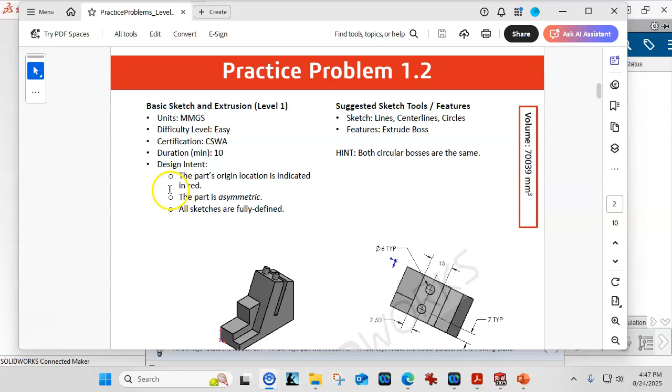The part's origin is located, indicated in red, in the bottom left corner. And the part is asymmetric, so mainly the back is shifted.

And all sketches are to be fully defined. That should be a really good habit you get used to.

And then sketch lines, center lines, circles, we'll do the extruded boss. Both circular bosses are the same.

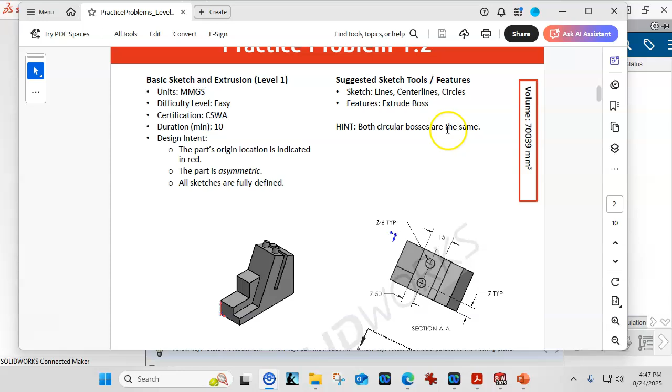So what jumps out at me in this model, looking at the front view, is we can divide this into, let's just say, three bodies, or three features, to create the one body.

So this main section, I'm not too concerned about the slot going through. We could include that in the sketch, or it could be a separate cut feature. It depends on kind of what our design intent is, what the function is of that piece. Is it going to be easier later on to make adjustments, corrections, even possibly eliminate it if the design warrants it?

So dimensions, we're going to be dealing with some angles. Not seeing anything too crazy, so we do want to pay attention to all of these.

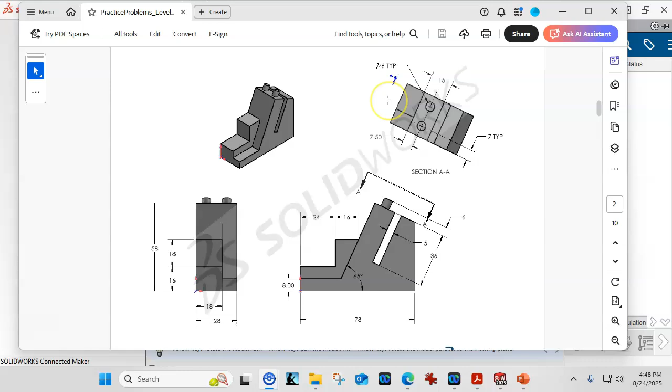Keep in mind that this being an auxiliary view, their origin is kind of floating out in space, which sort of makes sense, but that might be a little bit confusing. So let's go ahead and get started.

So I've loaded up the maker version. We're going to see the welcome to SolidWorks screen. If you want to use the defaults, part, assembly, and drawing, those are going to go back into the standard templates.

And I have created, if you haven't watched the starting SolidWorks for the first time video, I create these part millimeter and part inch, and I designated them. If you're using the maker, keep in mind that the education and commercial versions will load into maker, but once they're saved, they're maker parts and they don't go back. So that is why I've separated those out.

When I'm doing an introduction and just kind of feeling out the differences with the maker, when I switch back to the education version, then there'll be some things that we point out on that side. But again, you don't need to sign in unless you are using the maker version or the online, and we'll have a couple of extra things over here on the task pane to deal with.

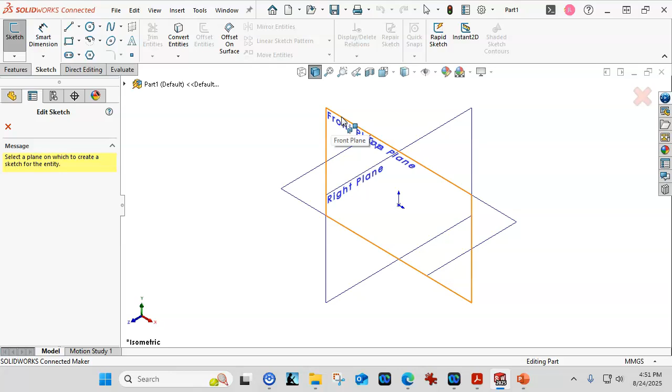Let's go with the sketch, and then I will add in my preferred right click. So if we do a sketch and then pick on the front plane, well, we're verifying that it is highlighted. And as we move around, we would see that color shift from plane to plane.

All right, so looking at this from that standpoint, I'm going to do the line command, and we'll move into more of the sketching tools as we go, but particularly at this point, I want you to pay attention to the on-screen icons, the relations, the inferred - the hey, you're there, but I'm not going to apply it - so the white background versus the yellow background.

And we're pretty much going to draw this first shape and get it as close to fully defined as we can. Then we'll worry about the slot.

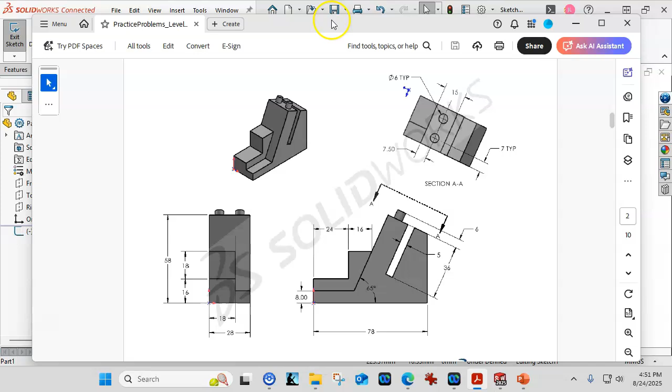Okay, so we're in the sketch. Horizontal is the short leg, vertical is the long leg. We go to the line command, or L on the keyboard, and I'm looking for that little bit of a snap. When I get close to it and the origin highlights, I see that yellow box.

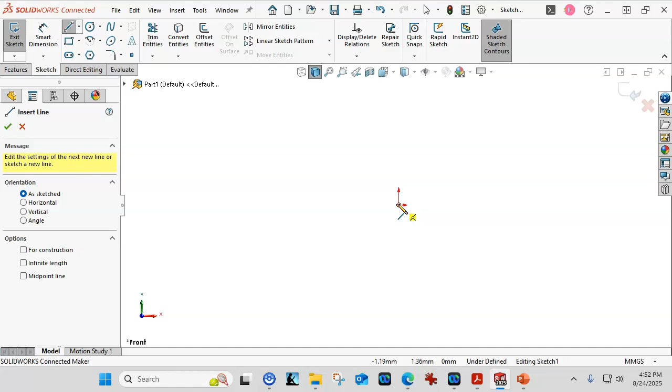That tells me that I'm going to get a coincident relation, and I clicked to place it, and our distance is about 78. I'm not going to spend too much time trying to get it exactly to 78, but close is okay. And then I don't really know what that one's going to be, so a click and a click, and we'll come back.

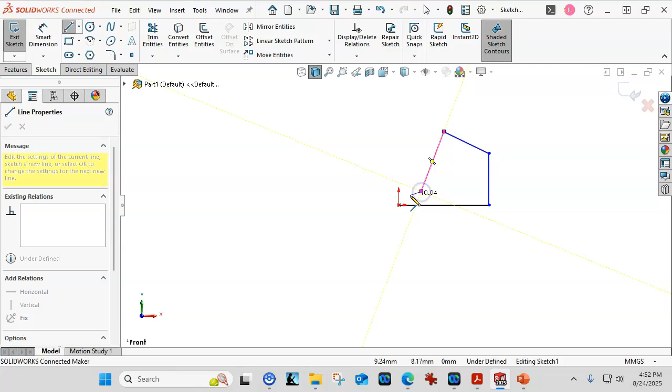Because of the angles, you have to be careful of picking a perpendicular. So I'm just going to accept and back out of those. We could also hit escape on the keyboard.

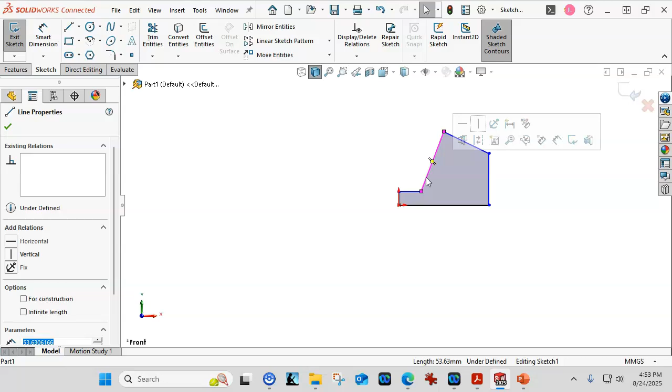As I go through these, we have the vertical, we have the horizontal, and what I'm hoping not to see are any perpendiculars that were inferred while I was clicking through and not really paying attention.

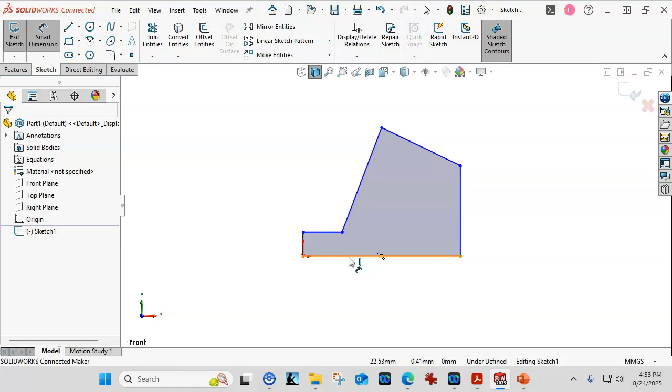So we're going to go into the smart dimension, and our process is always going to be, stay away from the midpoint unless you really want the midpoint. We'll highlight that object, click on it, place the dimension, and that gives us the modify box. You have to set that dimension down somewhere for it to activate.

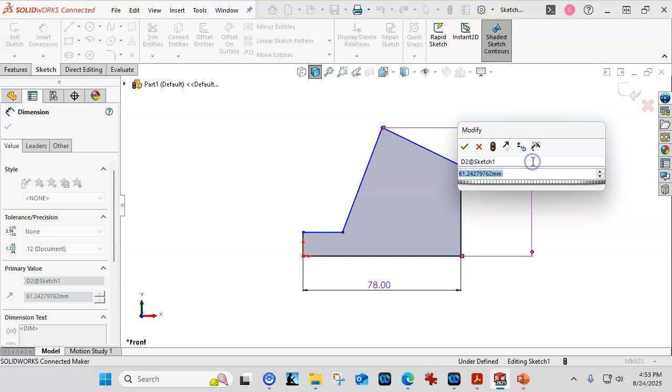We go into the 78. We have an overall to the tip of 58, so we're going to be looking at the base to the point. And then we have the 8 millimeters from the side.

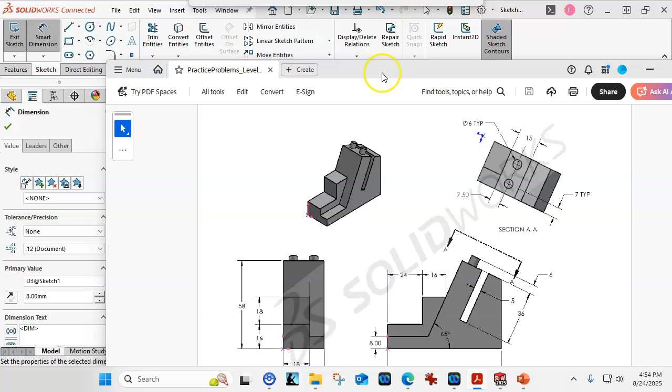Now they're throwing a little bit of a loop at us with that side geometry. Maybe I'm not ready to throw the areas at you, but it's something that we're going to utilize and you're going to have to get used to. So we'll go ahead with creating a couple more regions.

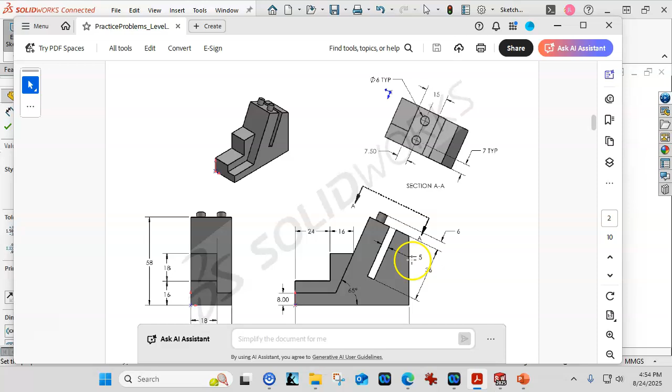So to build this out, I need the dimensions for this to kind of set the point of that angle, and these heights to determine where those items are coming up at.

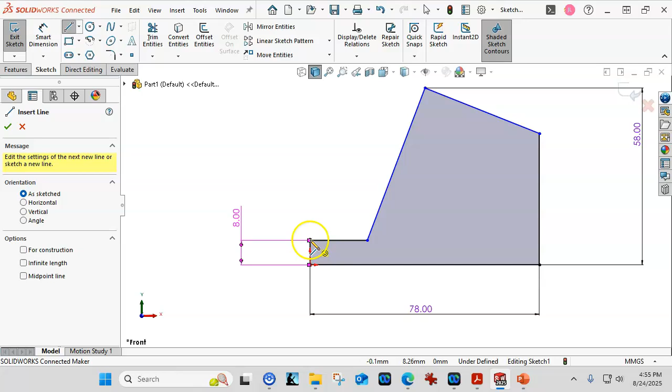That being the case, we're going to add in. Now, as a general rule, try not to create geometry on top of other geometry. Duplicate entities may cause the sketch to go underdefined. They're kind of a pain to diagnose. It's not a good practice, not a best practice.

All right, so there I got a midpoint. How do I deal with that midpoint that I didn't necessarily want, but I didn't catch it in time before I let go of the mouse button because I was doing the click drag?

All right, let's get out of that. When I highlight that point, I'm going to see the midpoint box in the work area. And then I'm also going to see midpoint 2. I can highlight that and hit delete on the keyboard, or we can right click and hit delete.

Be really careful with delete all. If we've applied a lot of relations to that one piece of geometry, then we probably don't want to delete all, because it does exactly what it says. Everything in that box goes away.

All right, so let me undo that because my fingers were ahead of my mouth.

I'm dragging this away, so a left click, hold down and drag, and I'm just looking for that to be coincident. If it's not particularly what we're wanting to select, I can always select the endpoint and hold down the control button and select. So you will hear me talk about select, control, select quite often.

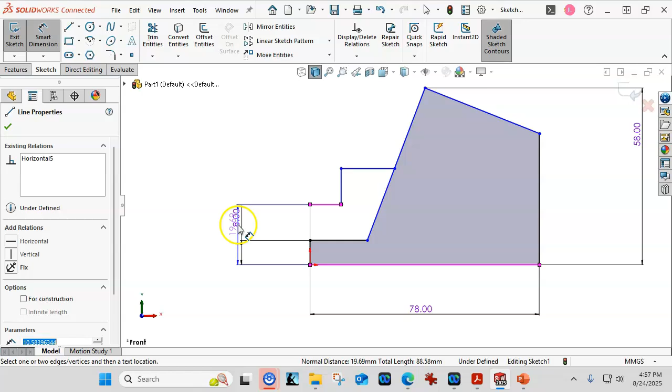All right, so let's see, that one, nope, that one goes, so I'm going to escape out of that. If I hit escape once, I'm still in the dimension tool. If I hit escape twice, I'm pretty sure it kicks me out of the tool, and we have to go back in.

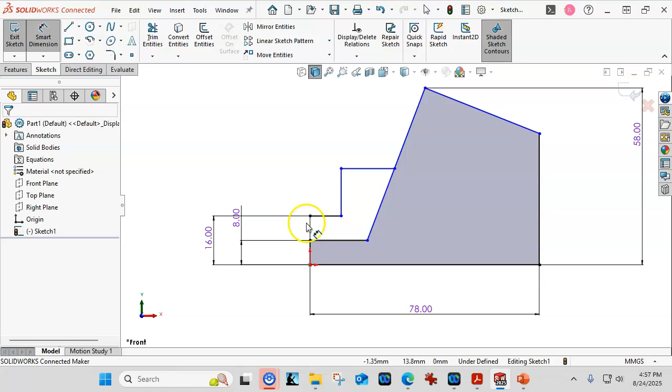So we're looking for those gray items. For example, if I hit escape, the smart dimension up here goes from the active gray to the lighter. All right, so I need to get back into that, make it the dark gray, and then we're going to add the dimension there.

And 18, and we have the 58. Oh, and then we're ready for an angle.

So what makes an angular dimension? Any two non-parallel lines. If these were at right angles, we would see the 90 pop up, but as soon as I pick the two objects and apply the dimension, it's automatically going to be in degrees, and then that's going to give us our working angle.

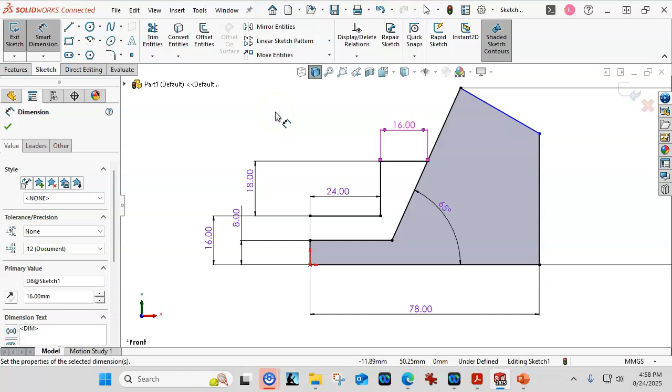All right, so that goes to 24, and that one goes to 16, and because it should push out the geometry, now I am looking for why this one isn't fully defined. So we have the 36 to the face.

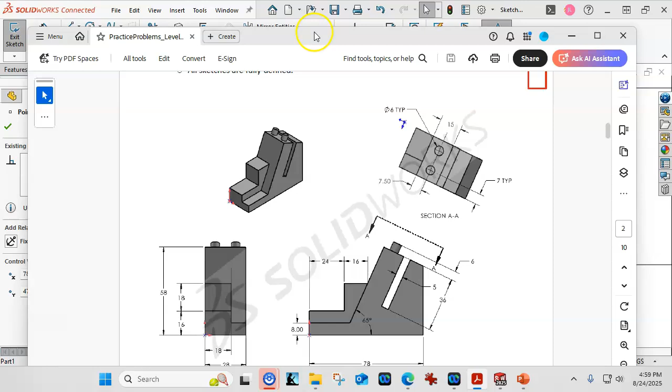All right, if I run my diagnostic tool, I think I saw another angle in here. Looking at this, the inference is that this is a perpendicular 90-degree angle. Since I did not infer that automatically, we'll do select, control-select: select the first object, hold control, select the second object, and that gives us our perpendicular relation. We could have also added a dimension, but I think the relation does the same thing.

Since we're using multiple regions, a quick definition: the outside shape is a contour, and the inside shapes are regions. So when we select geometry based on contours and regions, we're looking at the perimeter items versus the interior area items. All right, so I'm going to go ahead and draw the slot.

We're looking for coincident. I get an inference that says perpendicular, and we're going to drag that out some distance. I drag it over, and my yellow inference lines are highlighting against the little box giving me the perpendicular symbol. If you're not familiar with those symbols, pay attention to the add relations as they come up.

Watch out for that midpoint. I think I'd still rather stay a little ways away from the midpoint, since I'm pretty sure that wasn't it. And we can introduce another relation.

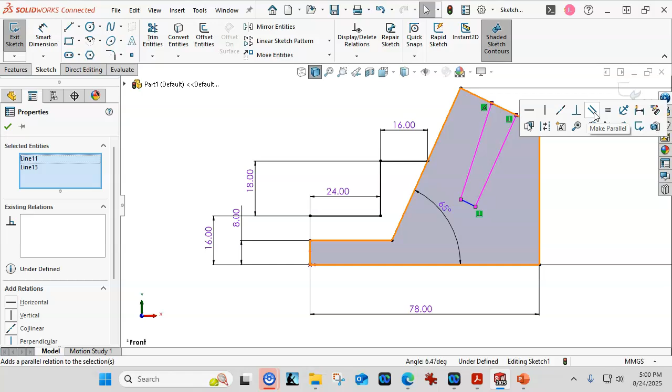I want to get out of the line command, so I'll just hit escape on the keyboard. Select, hold down control, select, and now we're looking for parallel. Or we can come over to the property manager and select parallel.

All right, so our dimension then becomes 36. Watch how the smart dimension handles this: if we come straight off, now it wants the linear distance of that line.

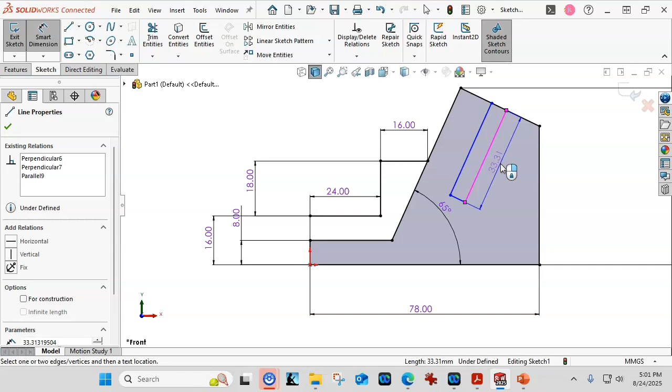If we go straight out or straight down, we're going to get the vertical or the horizontal. We need to stay a little closer to the line to make sure we get that linear distance, and then once I place it, we can go 36.

All right, and then you're placing dimensions where they're readable. Try not to make it overly confusing, but in a way that you can go back and very quickly error check.

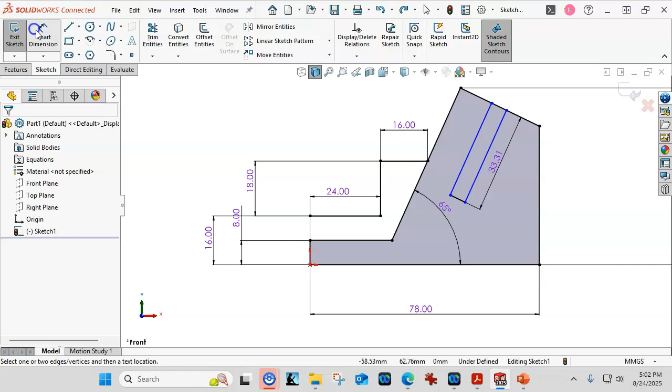So again, just watch how those are moving. Occasionally you'll click and it'll jump to horizontal, and I didn't want that, so I can either X out of it, or Control-Z will back me out of it, go back into the smart dimension, and that one is 5 on the width, and then we have 15 on this outside edge.

Okay, so if for some reason this came up with an angular dimension, we'd know that we did not get perpendicular, and we know we did not get parallel.

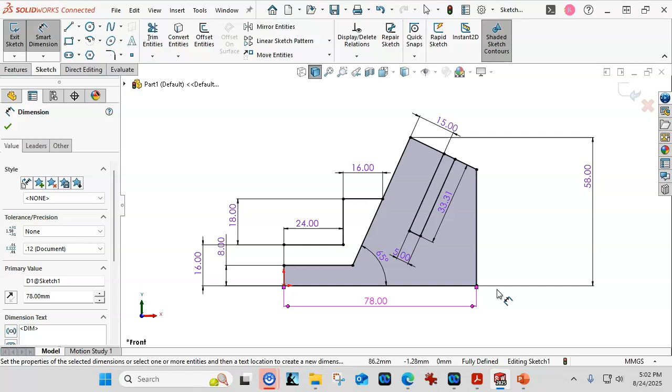All right, so I really like sketching this way. As a beginning second problem we're working on, maybe it's not my preference to jump into this right away. I'd like to have a few more sketching tools in place, but if you're coming from a 2D CAD background, then drawing this in and visualizing what these different geometries are doing shouldn't be that big of a deal.

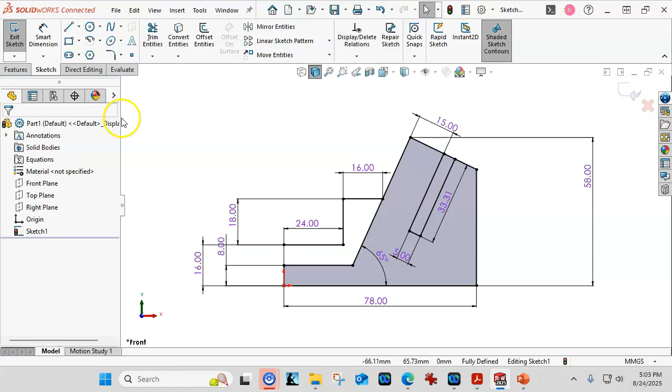All right, so let's go ahead and start some extrudes. We're going to have to pick, since this is not going to be a straight extrude. So I can escape and we'll go over to features. We don't have to close the sketch, we don't have to do anything except get back to features and tell it we want to extrude.

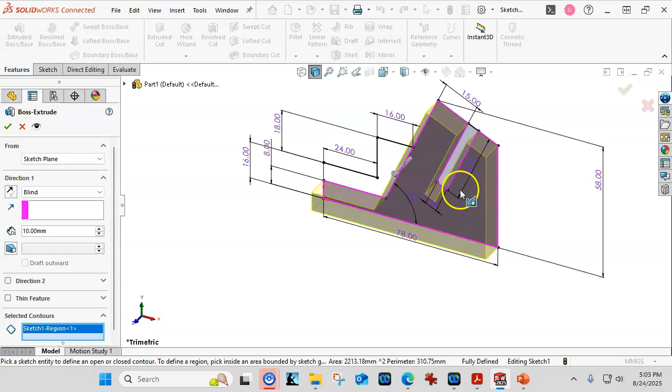So the longest section is going to be this, and notice that it automatically eliminates the slot. The geometry we'd need to pick if we wanted to close that in or make it a separate feature is I would have to include that in the selection for the selected contours. But contours means contours and regions. You'll see that information pop up in the box.

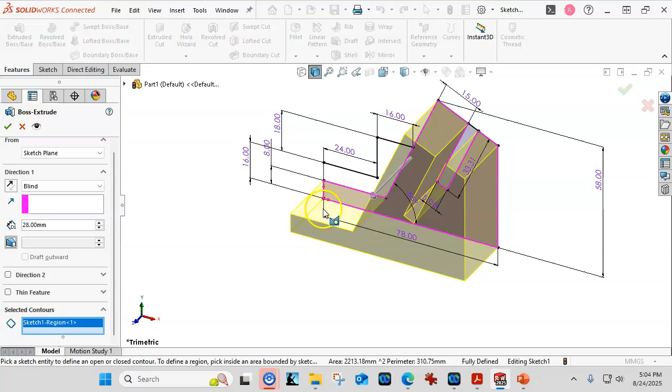All right, so this is going to go 28, and being conscious of the origin in that back corner, that is good. Then I want to activate that sketch again, making sure it's selected, since it automatically hides the sketch when we make the extrusion. I need to highlight that sketch again by selecting it. I don't necessarily need to be inside the sketch like I'm editing or making changes, but I do want it to be showing up on the screen.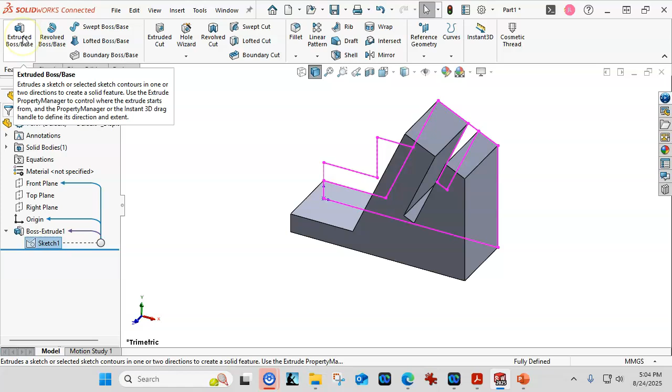And then we're going to extrude again, and this time I'm going to pick the region in there, and we want to make sure that the box is checked merge result. There are reasons why we would want to uncheck that, but it's worth a quick glance to make sure that we've merged, or we are merging the result. So that one has a depth of 18, and then we tab and we hit OK.

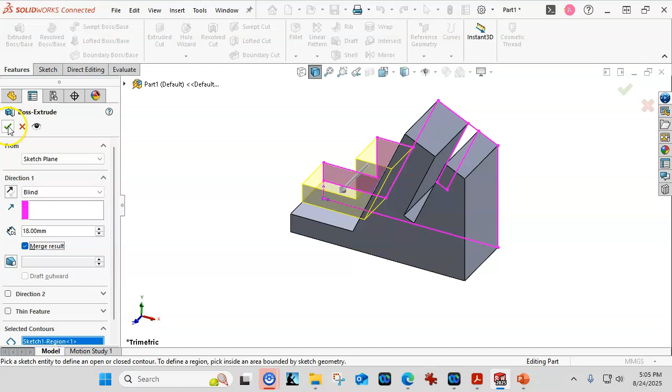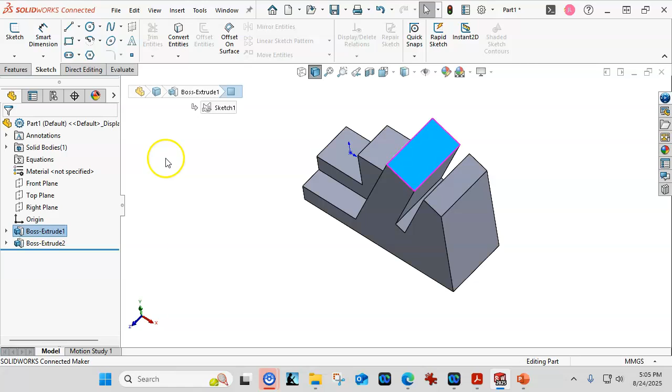So a little bit different strategy that we're building into this. My next sketch will go on this top face for the 2 cylinders, and the context pops up as sketch, but again, I lean towards pre-selecting instead of those context menus, but until you get used to all of this chaos going on the screen, let's stay a little bit with the command manager, and we'll work into those additional items.

All right, so we need a circle, and we need another circle. So I'm doing the click drag and rough positions. I'm going to add the relations as I go here. So select, hold down the control button, select, and those are going to be vertical.

The reason that I know it's vertical is I take a quick glance up here to my red origin, and the long leg tells me that I need to be vertical. The other thing as a visual clue is that the software will tell you, yeah, it's probably vertical, by bolding that selection and saying, hey, look at me. So we have those two.

Let's do another select, control select, and we're looking for equal. All right, and the words and the tooltips, the more you use these, the more that they'll be accessible. All right, so equal shows up, and we can go ahead and select that.

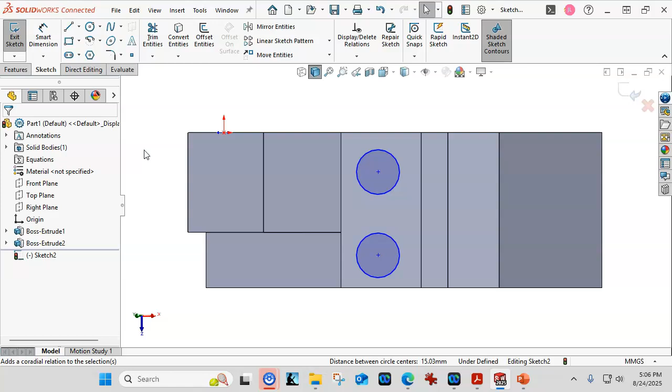All right, so what's left is dimensions. If I can, I apply as many relations as I can get into the sketch as possible, and then I go back and start applying dimensions. So 6 as the typical. I guess I need to let that go.

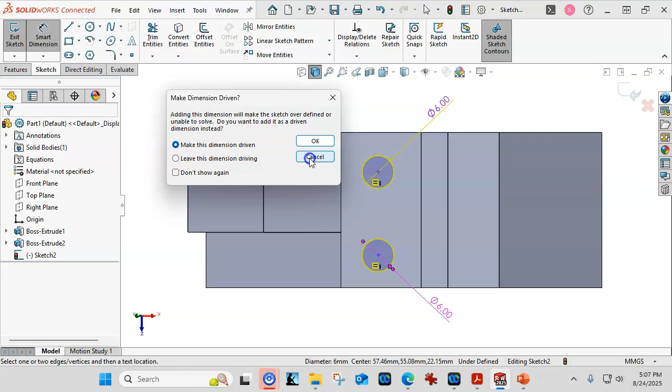Place it. All right, so what happens if I set an equal and apply another dimension? Making the dimension driven says this one has priority, and this one will act as, hey, I'm showing you what the dimension is, but you can't really do anything with it. So if you get one of these because you added one too many relations or one too many dimensions, unless it is a dimension that you kind of want to see, just go ahead and cancel.

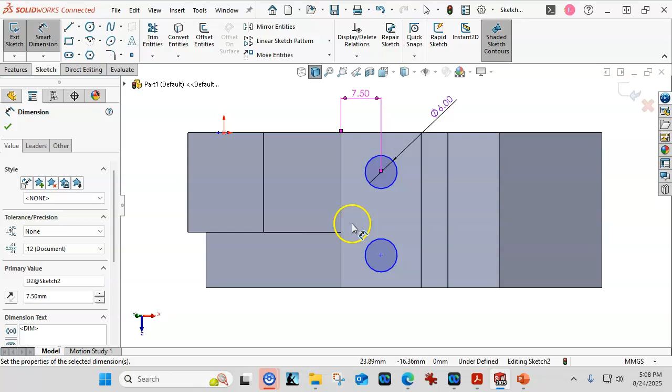All right, and then that's Smart Dimensions still active. And we're going to go from there to, still go with the perimeter, 7.5, so the halfway point. Other decisions that we might make is that I would find the midpoints and add some relation to the midpoints, or possibly a construction line.

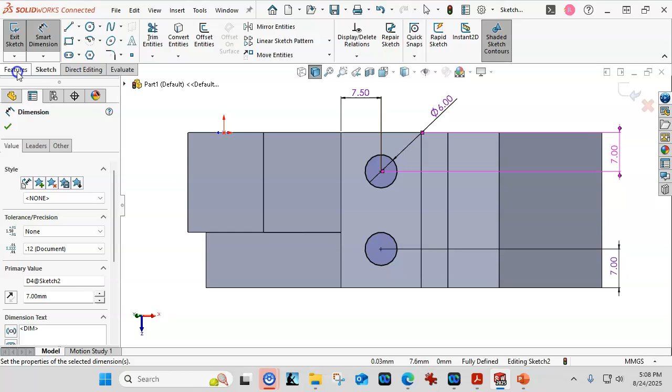Different ways to approach. So 7 millimeters from each side, typical. So in this case, without doing something like a mirror, which we're not really leaning towards just yet, let's go ahead and place those. And then this is going to be an extrusion of 6 millimeters. So we're looking for the feature, going into the extrusion, typing in the 6 millimeters.

Notice that this was highlighted in blue before I started typing, which means it's ready to go. It's in the correct box. It's a blind end condition, and it has the geometry. So at this point, we've completed. We're ready to look at the volume, see how well I did.

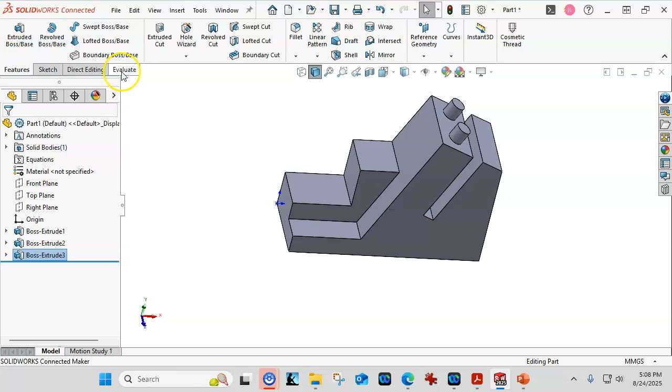So we go into the mass properties, and of course it shows up on the other screen. 70,415 versus 70,039. All right, so close, but if I follow all the dimensions, it annoys me a little bit that those numbers have a 200 or 300 cubic millimeter difference in what I'm fairly certain that my design and following the dimensions is driving all of that geometry.

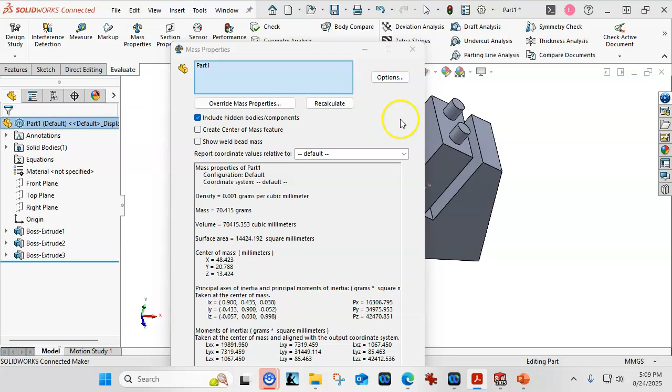So anyway, if you get the 70,415 and a center of mass roughly 48, 20, 13, we're on the same page, and I'm not going to worry too much at this stage.

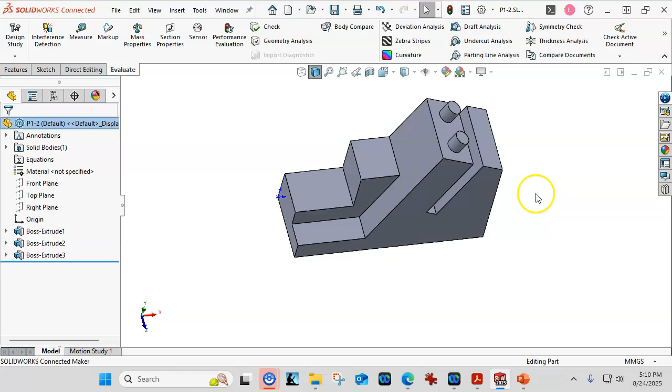We want to make sure that we're saving these. So let's go ahead and save. This is going to be P1-2. From the old DOS days, I'm hesitant to use more than one point. Windows does a pretty good job now, but it's just if I wanted to use something in place of the point, either the dash or the underscore would be the better option. So we go ahead and hit save, and then we're ready to close this and go on to the next video.